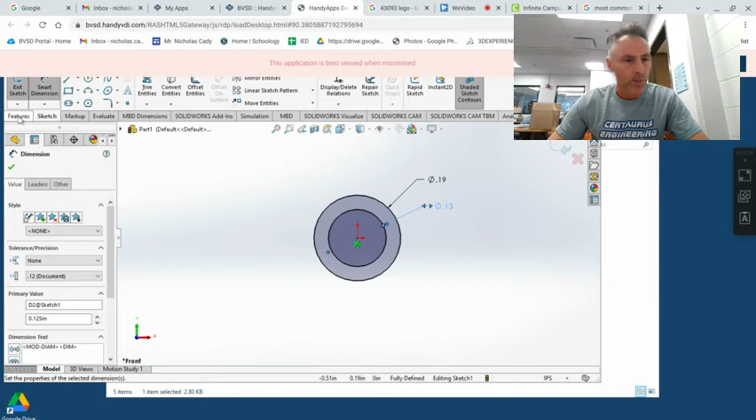So I'm going to do 3/16 on the outside, 2/16 on the inside, obviously two different circles here. And we're going to go ahead and give this a single Lego width, which we all know now is 5/16. Okay, and we're going to call that half of the thing right there.

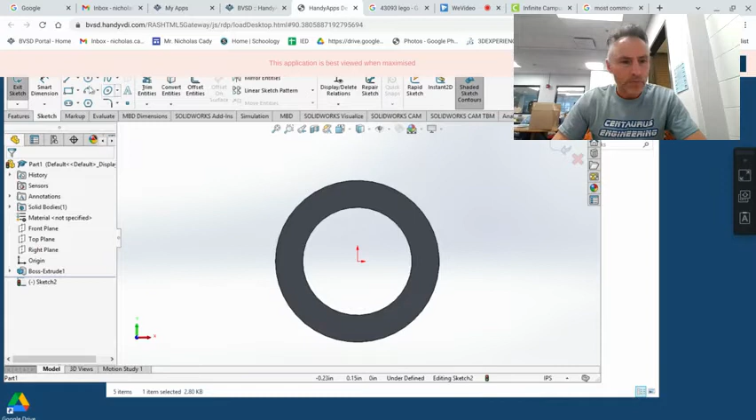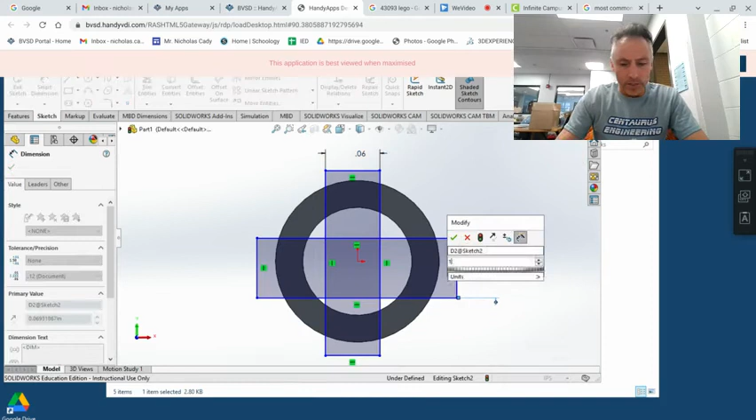Okay, and then we're going to throw another sketch right on this face, and we're going to have crisscrossing rectangles like so. And we can dimension these guys. They're going to be 1/16 wide and 3/16 long. So I'm going to say 1/16 for the width of that guy and 1/16 for the width of that guy. And I could do 3/16 and 3/16.

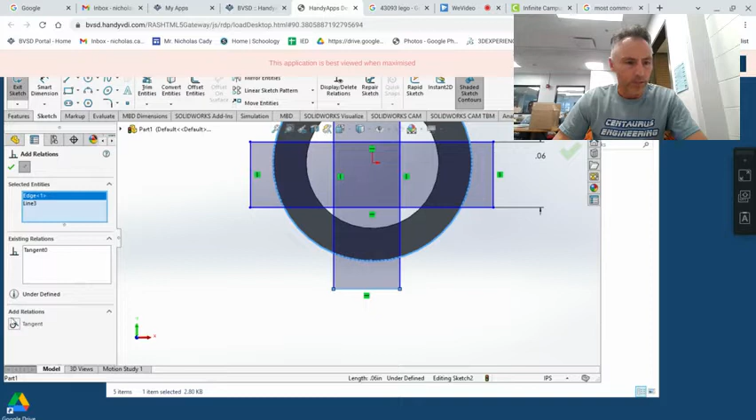But another way, since this outer circle is already 3/16, I'm going to just go to add relation. And I'm going to say, hey, that outer circle and that top edge, not the dimension, the outer circle and the top edge should be tangent to one another. And if I now tell that edge and that outer circle to also be tangent, that should lock it just about where I want it. Now you can see it's not totally locked, it's blue.

So I'm going to go ahead and do the same thing to here. I'm going to tell those two to be tangent, and I'm going to tell that guy to there to be tangent also. And then just to make sure it's perfect, it's saying it's under defined. Okay, now it doesn't look totally centered to me. So I'm going to do a few more dimensions just to make sure it is.

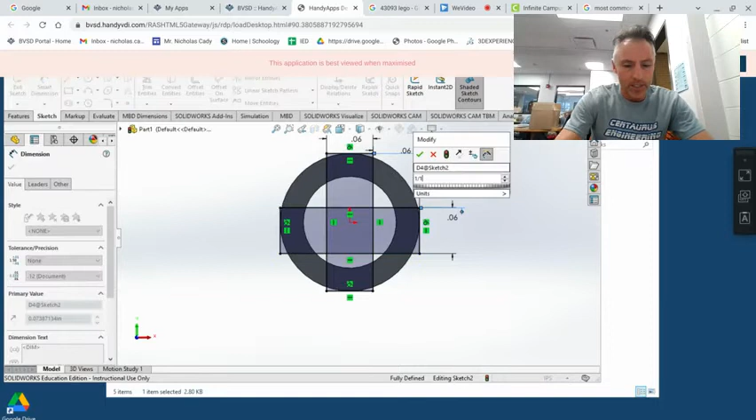I'm going to tell this dimension to here, that needs to be exactly 1/16 away. And if I do that, you're going to see that that middle rectangle just turned black. It is fully locked into place. And I'm going to tell this guy and this guy to also be 1/16 away from each other. And it just turned black, which means it's fully constrained also. So at this point, we can move forward with our extrusion of that plus sign.

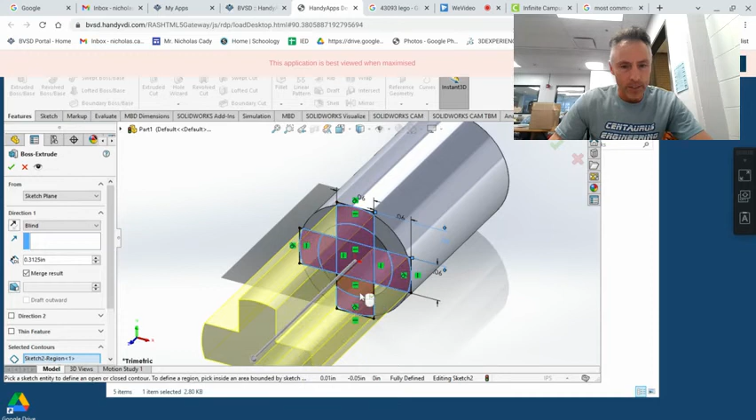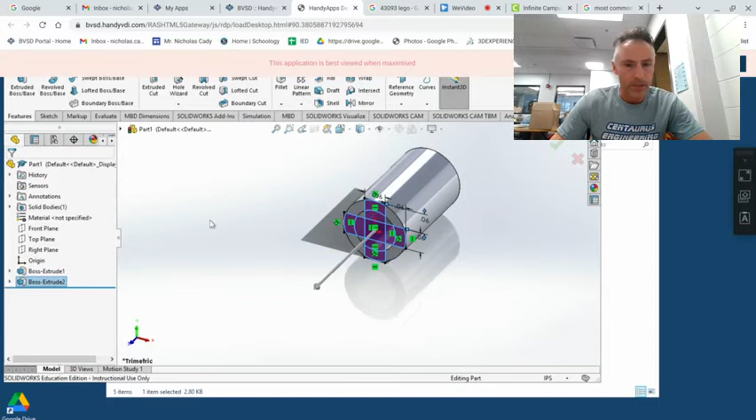And we're going to want to select all the different areas of this little buddy, because it's going to be a solid plus sign. And so the only things we don't need to select are what is outside of the circle. And that's going to give it a nice rounded effect, which you'll notice the plus sign looks nice and it's rounded like that. We didn't even have to do it. We just selectively did not choose those outside corners that are outside of the circle. Okay, and we'll make sure it's 5/16, which it is, and we'll say okay. And we end up with a piece like that.

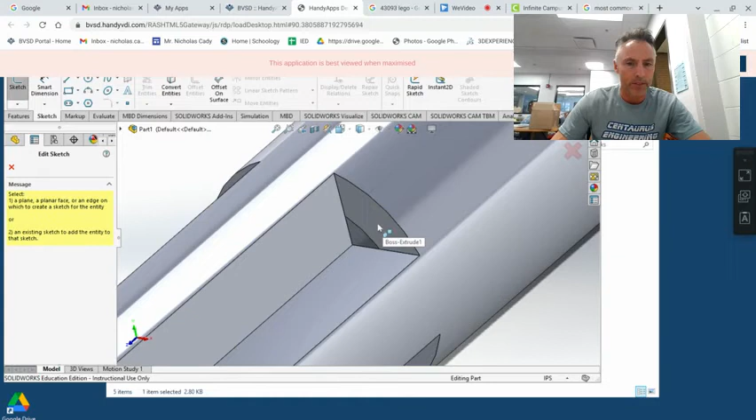Now, what you'll notice about the actual piece, it also has a ring in the middle, and it's small, probably somewhere in the ballpark of 1/32, but we'll do it and we'll see what looks good. So let's start one more sketch. I'm going to put it right on this face because I know that face is right in the middle of this part. So if I click there, it put the sketch on that middle face. Even though I'm looking at this side, I'm actually sketching on that middle face.

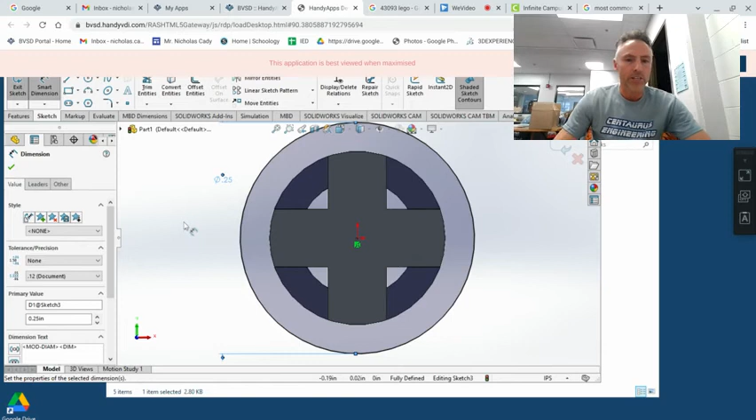And I'm going to take that little circle, lock it to the middle here. It's going to be a little bit bigger than the whole thing. And since that inner circle was 3/16, this guy is probably going to be something like 4/16, just ever so slightly bigger. And you'll see it is actually in the middle. Now, when we go to extrude it, we're not going to want it to go just one way or the other. So we'll choose the option that is mid-plane, where it extrudes it evenly both ways.

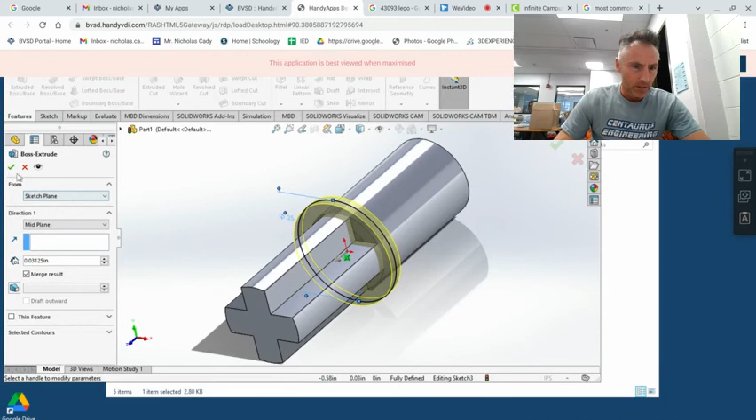But like I said, we don't want a very big extrusion. So let's take a look at 1/32. That's a nice little ring. And if I compare that to what we see here, it's about the same. So let's go ahead and accept that guy. And that is our ring that joins the two together. And we're going to say that for an axle to pin, we're pretty happy with that.